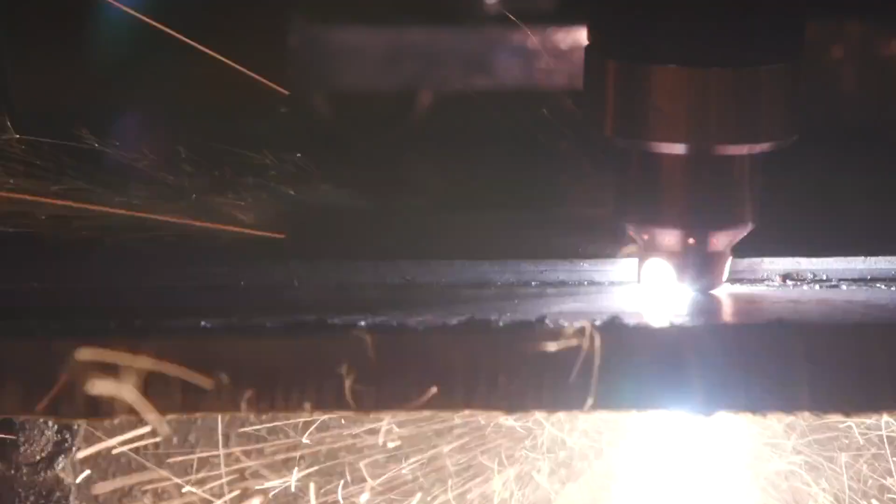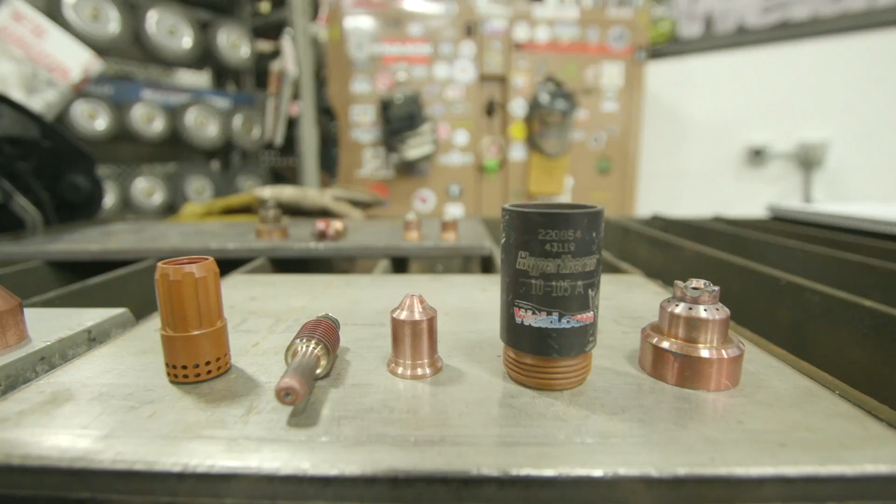So today we're going to talk about the basics of plasma arc cutting. We're going to go over all the consumables, how to tell when they're bad, what types of consumables to use. We're going to go over the settings for the machine, and we're going to cut some different types of materials.

So the first thing we want to talk about is what is plasma. Plasma is the fourth state of matter. You have solid, liquid, gas - those are three states of matter everybody's familiar with. And then plasma - it's just a superheated column of gas. So lightning is considered a plasma. The plasma column is a 40,000 degree Fahrenheit heat.

Within this system, we're going to use a transferred arc system, meaning we have to have a workpiece clamp, we have to have a torch, there's going to be an electrical circuit, electricity is going to flow through that circuit, and we're going to be able to cut any material that's electrically conductive. So it doesn't matter, steel, stainless, aluminum - doesn't care. As long as it's electrically conductive, we can cut with it.

Whereas with oxyacetylene, it has to contain iron, because oxyacetylene is a chemical reaction. It's basically an accelerated rusting process, so it's limited to items that contain iron. So you can't cut non-ferrous items like aluminum or stainless steel, chromium, nickel, anything like that.

So there's a lot of advantages with cutting with plasma cutting. For instance, we have a smaller heat affected zone because we don't have to preheat. We're running a 40,000 degree Fahrenheit plasma column, so we're going to cut through that piece of material a lot faster.

Some of the limitations with it - it's not as portable as the oxyacetylene kit. I can pick that up, I can put it on top of a building, no problem, it's a self-contained unit. With plasma arc cutting, I have to have a power source and I have to have air, whether it's compressed gas in a cylinder or shop air. So today for our demonstration, we're going to go ahead and use shop air - that's probably what most of you have at your disposal.

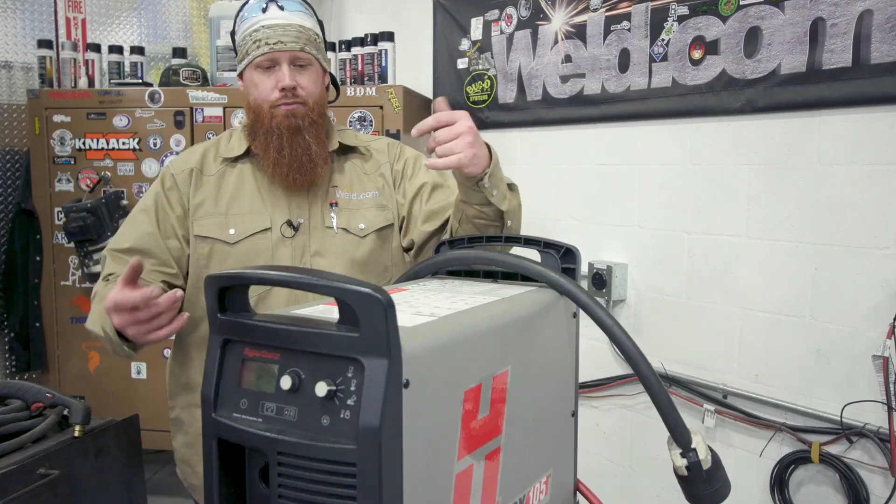So the first thing we're going to do is plug in the air. We have 100 PSI coming into the system. On this system specifically, this is 135 PSI max, so we're going to make sure we don't exceed that. This machine is actually pretty cool because it actually regulates the air pressure coming in off the amperage that's going to be put out. Your machine may vary slightly, so make sure you check your user manual for the air pressure settings as well as your amperage settings for the type of equipment that you have at the house.

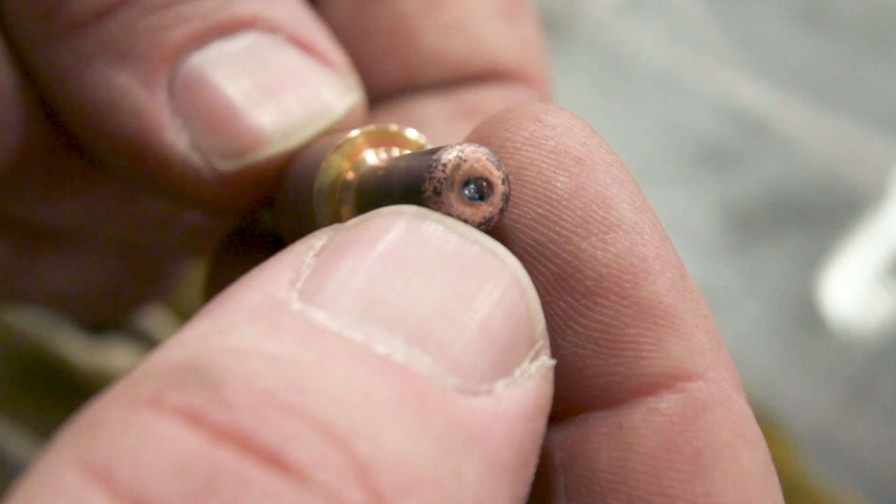First thing we're going to do is just plug in the air hose, very simple. Now in here we have a filter. You want to have an air dryer, filter, all that good stuff in place, because if you start getting moisture in your lines, it's going to come out in your torch and you're going to burn up your consumables a lot faster. So if you notice that you're pretty proficient at the cutting process, but you keep burning up your consumables, it's probably because you have moisture in your line.

So hook up an air dryer. They make little attachments that go on the back end that'll kind of help prevent some of that stuff from getting in your lines. Next thing, let's go ahead and take a look at the front of the machine, and we'll start setting up the accessories, the attachments that go with it.

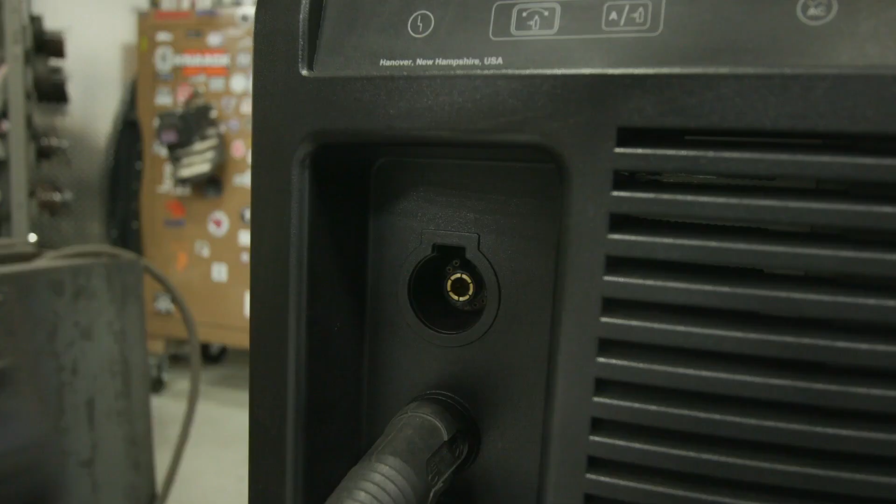So the first thing we're going to hook up is our workpiece clamp. It's not a ground clamp - I mean, you can split hairs and get technical about it, but it's just a workpiece clamp because plasma cutting is DC negative, meaning that when I hook the workpiece clamp up, I'm actually hooking up to the positive. The cool thing about this is you can't screw it up, so I can't put it on the wrong polarity, even if I wanted to, because the attachment points are completely different. The torch plugs into this hole, and the workpiece clamp plugs in here. So you can't screw that up - even a welder can't mess it up.

All right, so let's talk about all the consumables that go in here. The first thing, if you notice, on top of most machines or on the side, you're going to have a little diagram with part numbers and descriptions of what everything is. That's just going to make it a lot easier for you to order it.

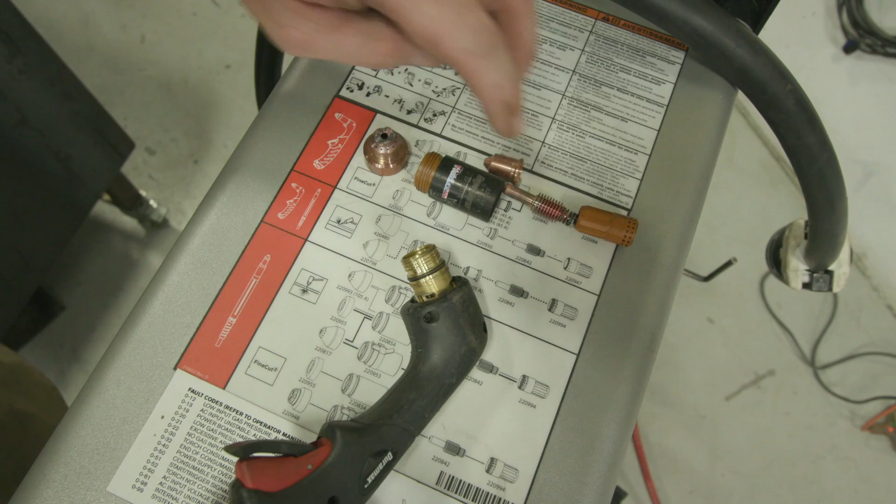So the first thing is the swirl ring. The swirl ring is actually going to direct our air down through the torch, and it's going to create a counterclockwise direction for the plasma column to follow. So it's just going to make a nice cylindrical shape of the arc.

Right here's our electrode. Electrodes are typically made out of tungsten or hafnium. You can tell when they start getting bad because you're going to develop a deep pit in here. Anything after a depth of about 1 millimeter, that's about time to throw the consumable out. But if you're less than 1 millimeter, or the equivalent of a 32nd, it's still good - so don't throw these away until you reach that depth.

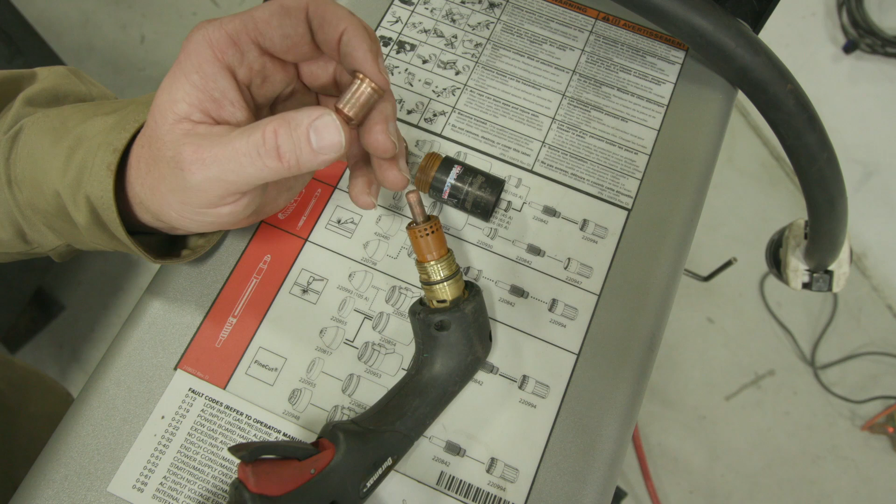That's just going to slide in here like that. This is our nozzle. Now note, this nozzle is 105 amp for our system. Make sure you have the correct nozzle that you intend to use when you're cutting, because if I ran like a 45 or 65 in here and ran 105 amps on my machine, I'm going to burn this nozzle up. Now nozzles kind of get - whenever this hole up here starts getting elliptical, or it has a circle in there, or dented, damaged, cut up, burned up, it's time to change that out.

This is something you don't want to make contact with your material. You should stand this off roughly 1/8 of an inch from your material. We're going to cover that when we get into cutting, but make sure that this doesn't make contact with whatever material you're cutting, because it's going to tear that orifice up. Once that orifice is all messed up, your cut quality is going to go downhill really quick.

All these pieces go in here just like this. You really can't mess this up - if you do, the torch won't work. You'll get an error code on every machine I've worked with. If these aren't in place, if something's missing, this torch will not fire, because it has different safety measures in here. I have a retaining cap right here.

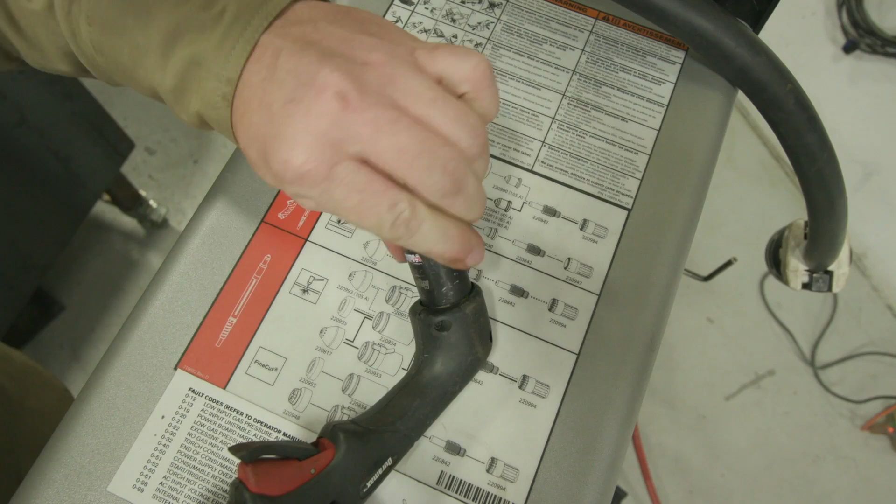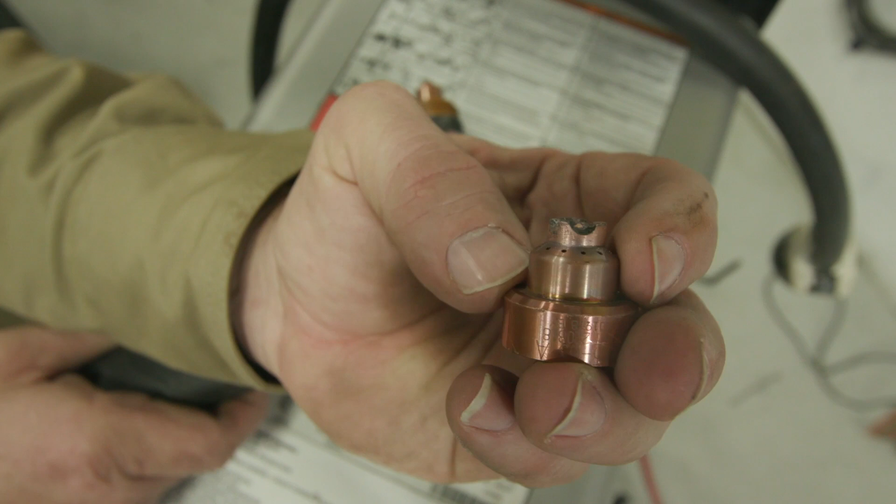This is just going to hold everything together, and then we will take our shield and put that over top of here. Now this is a drag shield - notice it's got like a crown on top of it. I'll be able to put this right up against the material and won't have any issues with that. Notice there's little air ports around here, not like where airplanes fly out of, but there's little ports where the air comes out, and that's going to keep all my consumables shielded as I'm cutting. So I'll slide this over top of here, lock this down, and again, this I'll be able to make contact with the material. It's going to stand off a distance that's going to keep that nozzle protected on the inside of the torch.

So depending on the thickness of the material you're going to cut, you're going to swap out your consumables. You have like 45, 65, 85, 105 amp consumables. Today we're going to be using 105 amp consumables just because that's what we have on hand. We're going to cut a variety of material thicknesses, and we'll be able to do that all based off of 105 amps. Unlike welding, where I need specific amperage for different thicknesses of material, my amperage is going to stay constant depending on the type of consumables that I put in there.

The only thing that's really going to change is my travel speed. If I have thicker material, I'm going to cut slower. Thinner material, I'm going to cut a lot faster. I'm going to show you how that works when we get over here to cutting the material.

Now that we're plugged in, we're going to go ahead and turn this on. I prefer to plug the machine in after I've got everything hooked up to it. This is my personal preference. I think it's a lot safer that way.

So we're at 63 amps right now. I'm going to go ahead and crank it up to 105 because I have 105 amp consumables in here.

Now you'll notice that I have a selector switch over here. The first one has little spaces in it—that's for cutting expanded metal. So if you have perforated material, expanded metal, anything like that, this is going to be the appropriate setting.

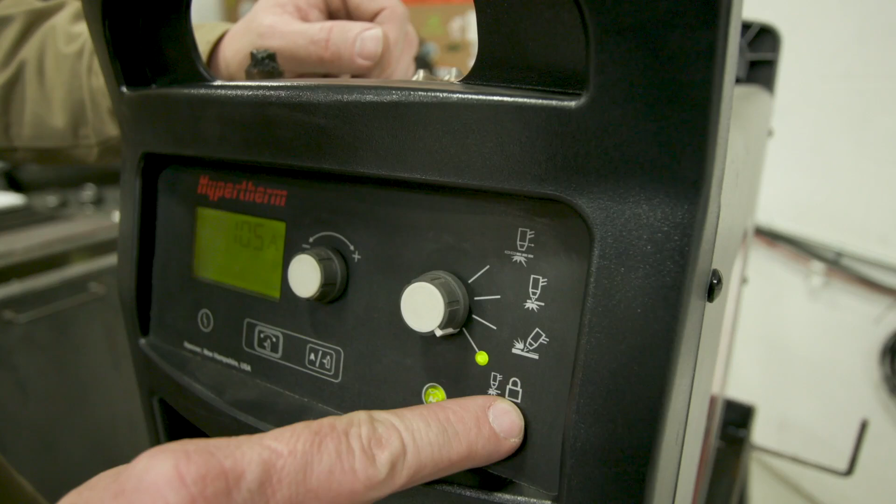You can kind of see it's at an angle. The last one here is just a trigger lock, kind of like 2T or 4T on your foot pedals and finger switches on your TIG torches. Very similar—I pull the trigger and let off, and that pilot arc is going to stay lit until I pull that trigger again and let it go.

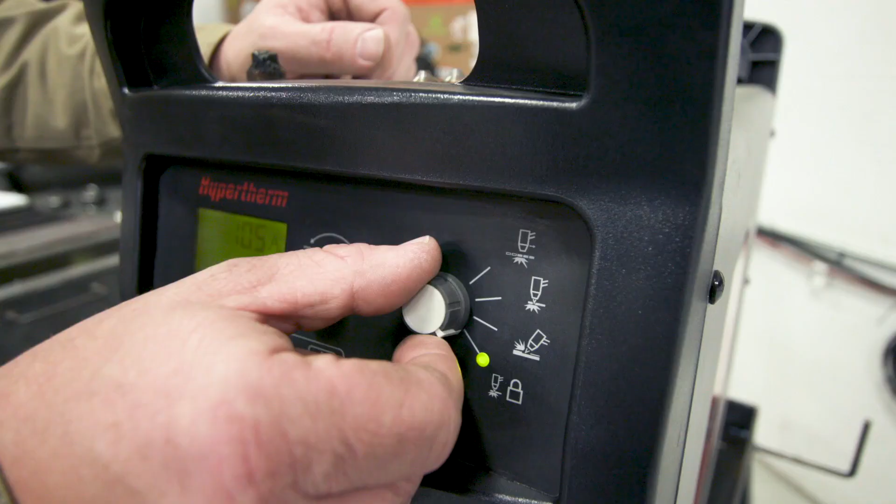If you're doing long runs, that's great. That's probably where you would use that setting—long runs on material, anything like that. I'm going to go ahead and set it here for solid material, and we'll hop on over here and go over some of the consumables one more time to explain, and then we'll do some cutting.

Okay, so let's go ahead and talk about worn out consumables first. This right here is our electrode. See how we have this big divot in here? That's bad, that's not what you want. Anytime it exceeds about a 32nd of an inch or 1 millimeter, you want to go ahead and throw this out.

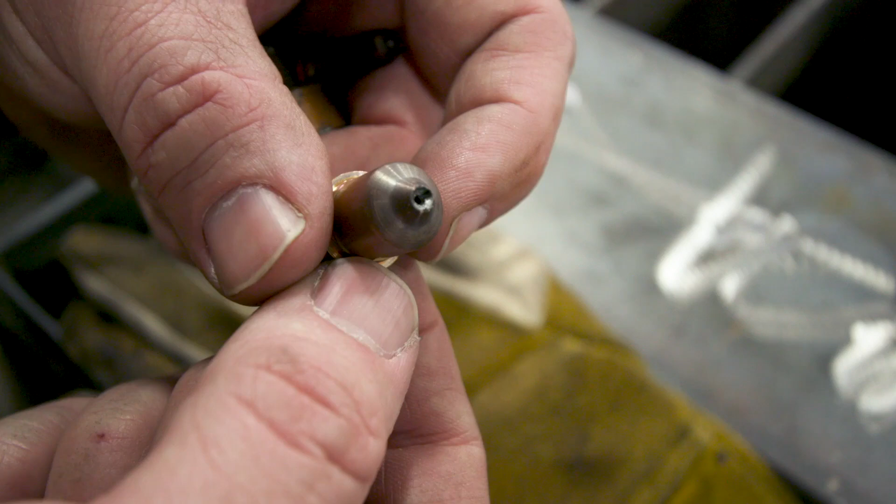Now here's a nozzle that's seen better days—it's kind of well worn. The orifice, the cutting orifice in here, is kind of wallered out. Yeah, that's a word, wallered. Once it's torn up like that, it's good practice to swap both of these out at the same time. The manufacturer recommends that anytime you swap out your nozzle, go ahead and swap out that electrode.

And vice versa. This is a drag shield. I don't know what happened to it, just laying around the shop—looks like it's seen better days, got some melted areas in here. That'd be a good time to go ahead and swap this out as well.

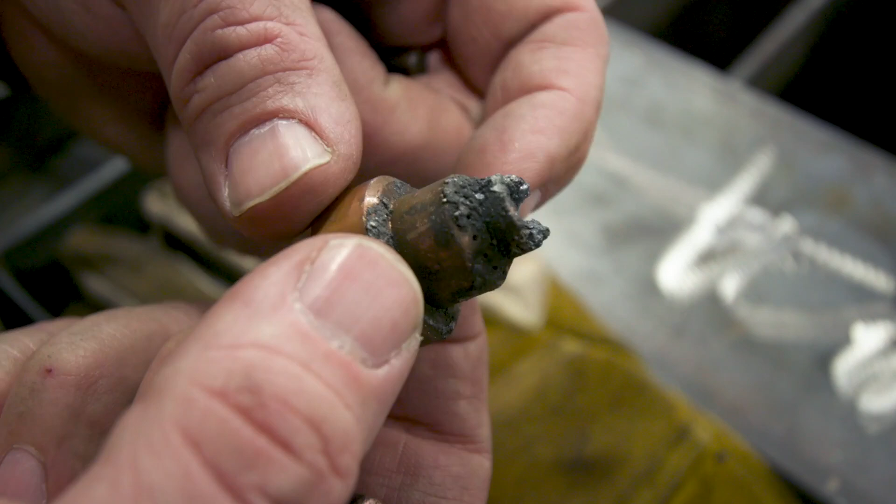Remember, it's okay if this piece makes contact with the material—it's not part of the electrical system, so you can make contact with the material. That's exactly what it's designed for, to keep that standoff distance the appropriate amount away from the material while you're cutting. But it's probably a good time to go ahead and swap this guy out.

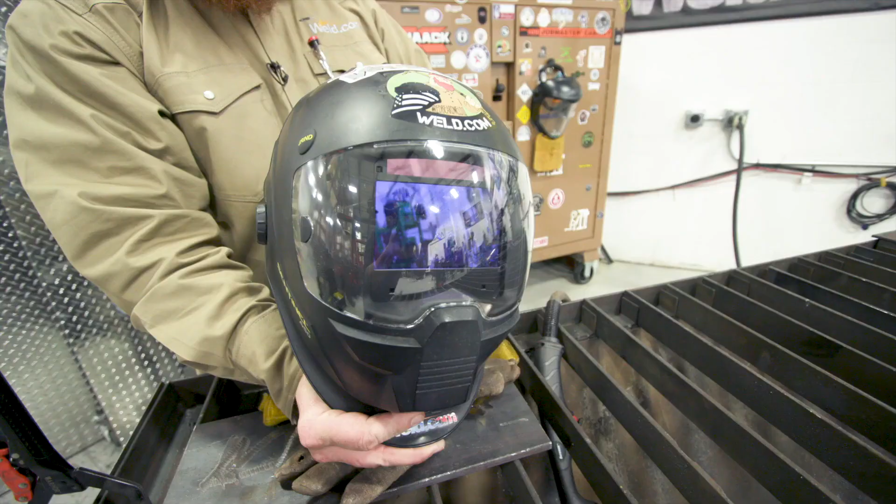So let's go ahead and talk PPE real quick, because with any job that we're going to do, safety is always first. Wear dry garments, so welding jacket, welding cap, always a plus. Safety glasses, as we discussed in our last video. I prefer to use a welding hood, just for the simple fact that I'm going to deal with 105 amps here.

Infrared glasses, while they're great—these are awesome for oxyacetylene cutting—this is not something I would use if I was going to be doing plasma arc cutting, anything probably above 40 or 50 amps. So because we're using 105 amps, I'm going to go ahead and use the shade 9 on my welding hood.

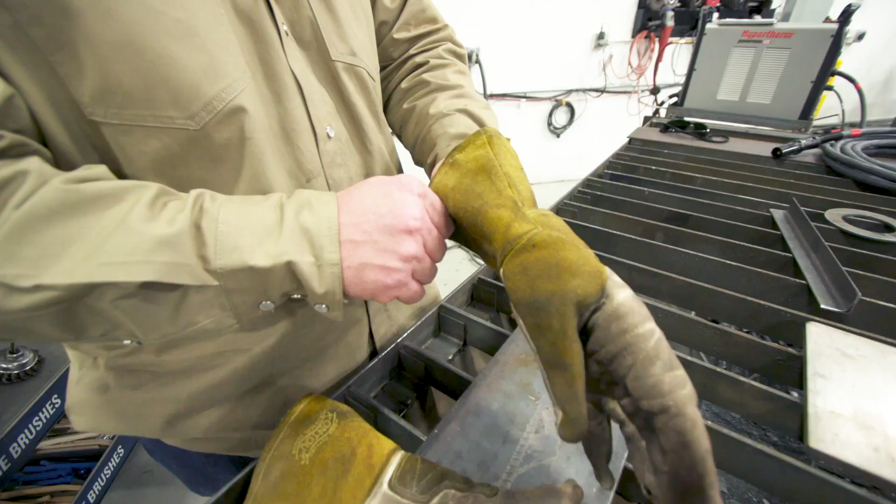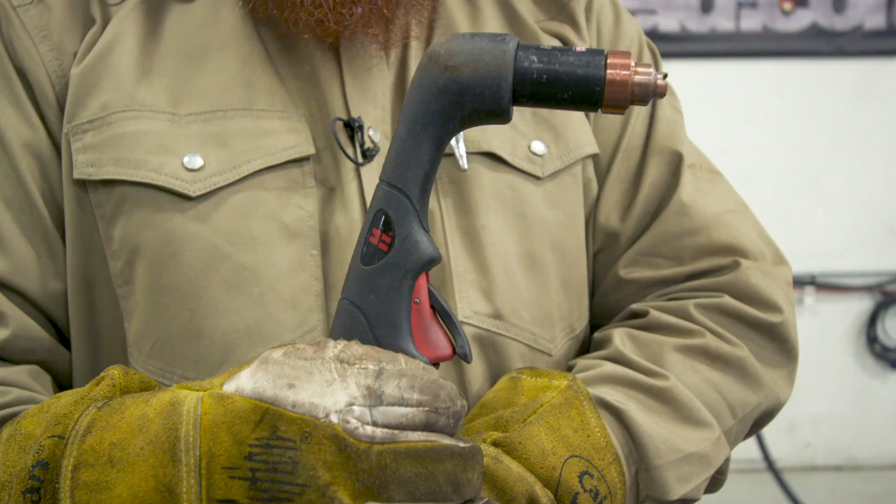And then we're also going to make sure that we wear leather gloves. Again, stay away from synthetic fibers because they're going to melt, and when they melt, they're going to melt to your hand—you're just going to have a bad day. Something with a little bit of dexterity, because on here we have a safety switch, and you want to be able to get your finger up underneath there. So a big gaudy pair of arc welding gloves probably aren't the best things to use.

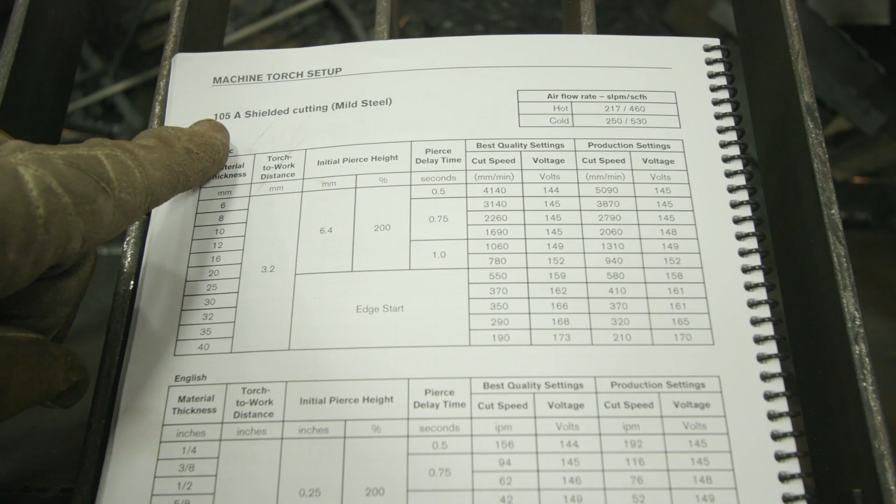I'm going to reference my manual here. It says for 105 amp consumables, which we have in the machine right now, mild steel, I'm going to cut some 3/8 plate. It tells me I need to run about 94 inches per minute. So how do I gauge that?

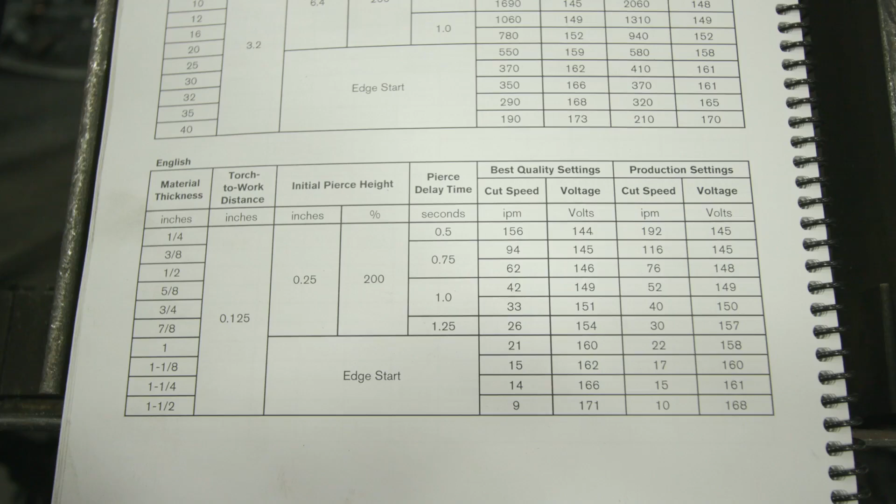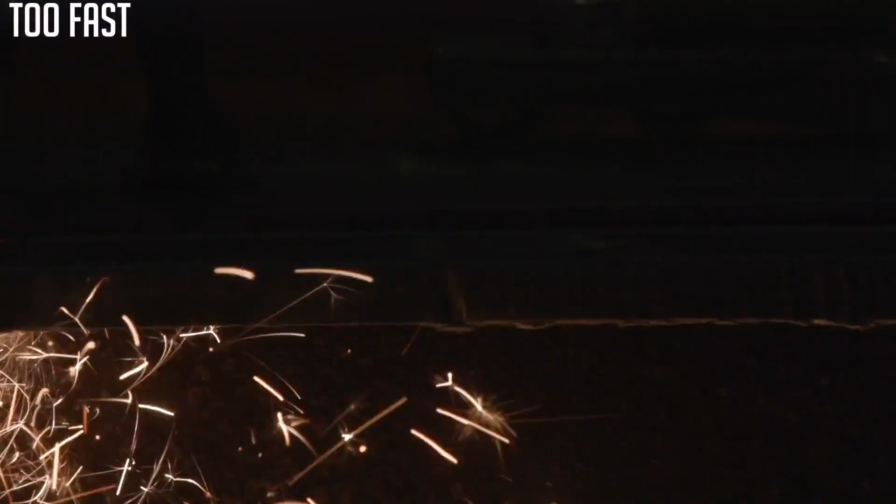This is something you're going to have to do visually. If you're cutting too fast, you'll notice all your sparks are shooting out away from you, or in the opposite direction you're cutting, at a pretty steep angle. You want them to come out slightly, probably about a 10 to 15 degree angle from the bottom. If they're coming out straight down, you're cutting too slow.

I know that sounds counterintuitive, but if you cut too slow, you're going to have a much wider kerf, which is the area of material loss due to the cutting process. Doesn't matter if it's a Skilsaw, table saw, plasma cutting, or oxy-fuel, that's what that kerf is. So that's the width we're taking out of the material. You want to make sure you're cutting on the appropriate side of the line, or on the line, and understand the width of your kerf.

If I cut too slow, I'm going to have a much wider kerf, and a lot more dross on the bottom of my plate that I'll have to clean off later. I don't want to deal with that. I want to make this as less labor intensive as possible. So we'll show you three cuts: too fast, too slow, and then just right, kind of like Goldilocks.

I'm going to get rid of the paper because plasma cutting can shoot sparks up to 40 feet, so I'll try not to cut towards the cameraman over there. You also want to check the surrounding area, especially in a small garage or shop. If you've got gas cans or lawnmowers around, move that stuff out of the way or move your cutting operation to a different area. These sparks can travel up to 40 feet, so don't cut in enclosed spaces.

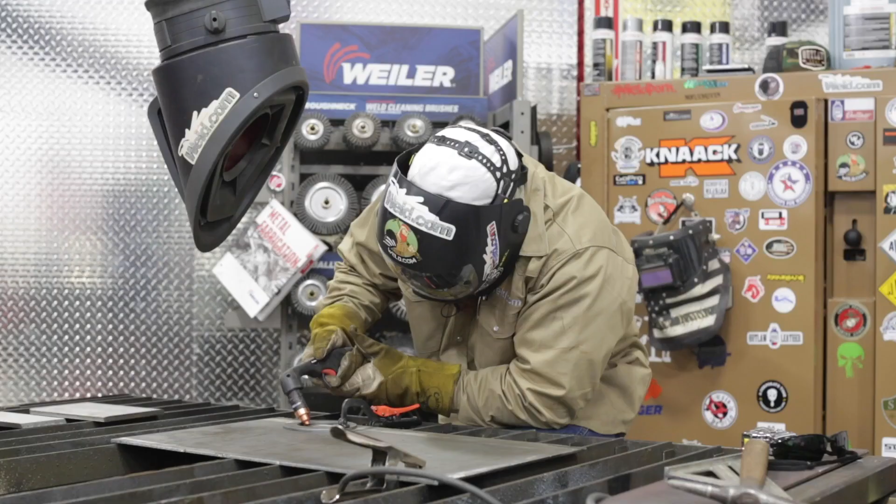While we're on the topic of safety, fume extraction is a must. We're going to set up a vent over top of this while we're cutting. You don't want to breathe this stuff in, especially when we get into stainless and aluminum, because stainless contains hexavalent chromium. Anytime we cut, grind, or weld on that, make sure you have a respirator or source fume extraction. Same thing with aluminum, this stuff is just nasty to breathe in. You don't want to do that.

So set up the fume extraction. If you're in your garage, set up a fan. If not, set up the operation outside. Just make sure you're not doing it over a bunch of dried leaves and grass and stuff like that.

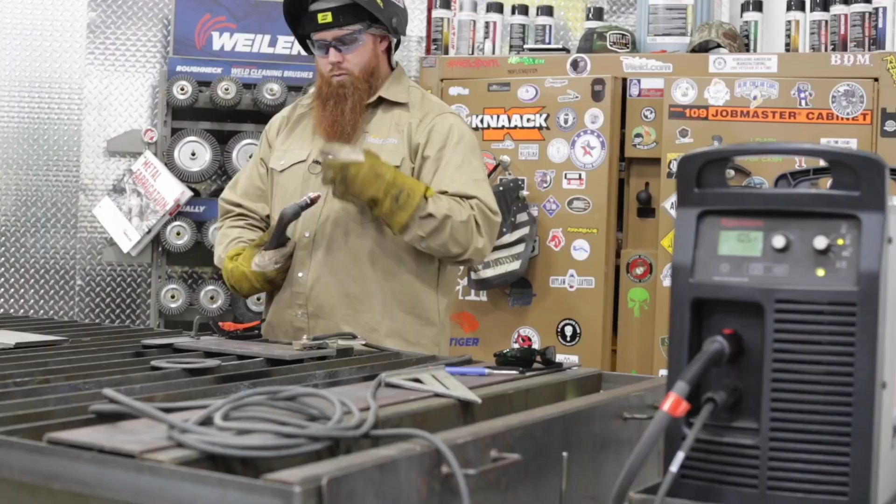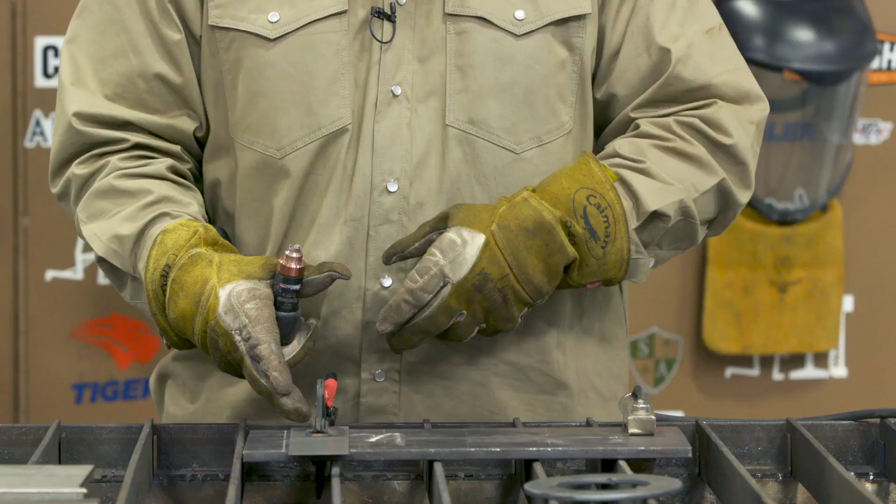What I want to do now is measure from the outside of my orifice, or the outside of my drag shield, to the center of my orifice, and it's about 3/16 of an inch. So I'm going to offset a piece of flat bar, or just a little piece of sheet metal, 3/16 of an inch from the line I intend to cut. That's kind of how you keep everything nice and straight while cutting and fabricating. Just set that little offset. This is 3/16, yours is probably going to be different.

Same thing if I have a standoff guide, I would actually measure from the outside of that standoff guide to the center of the orifice on the torch. That way when I cut, I get nice, clean, consistent cut marks, and my accuracy is going to greatly improve versus trying to do this freehand.

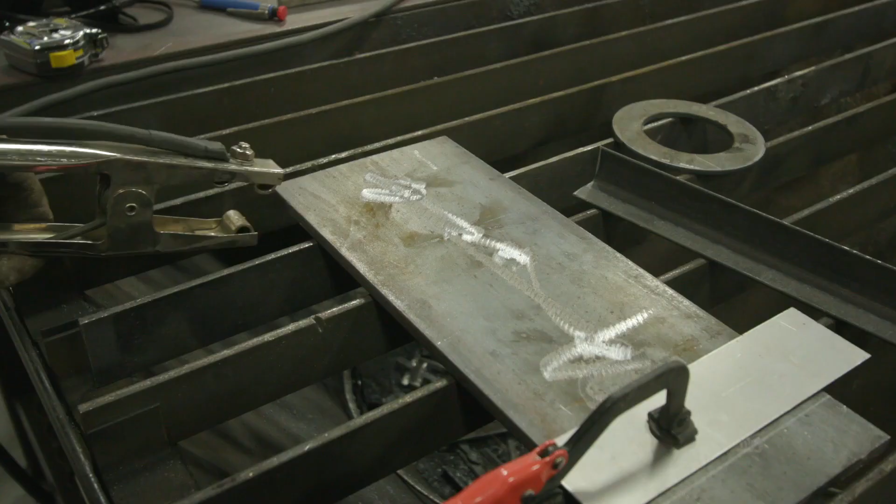I went ahead and hooked up the workpiece clamp because you want the electrical circuit to be the path of least resistance, right, since we're using an electrical system to do this. Notice that the workpiece clamp is on the side that's going to remain on the table. I don't want to put it on the piece I'm cutting off, because once I cut that piece off, it falls with the workpiece clamp, and I could become myself the path of least resistance. Okay, this is a high frequency system.

I don't want to get shocked with it. So keep the workpiece clamp on the material, not the part that's going to fall off. Try to keep yourself out of the electrical circuit. Don't put yourself in that situation.

I could hook it to the table, but like I said, path of least resistance. So the closer I can get it to the material, the better cut quality I'm going to get, the better ease of use, more efficient I'm going to be with it.

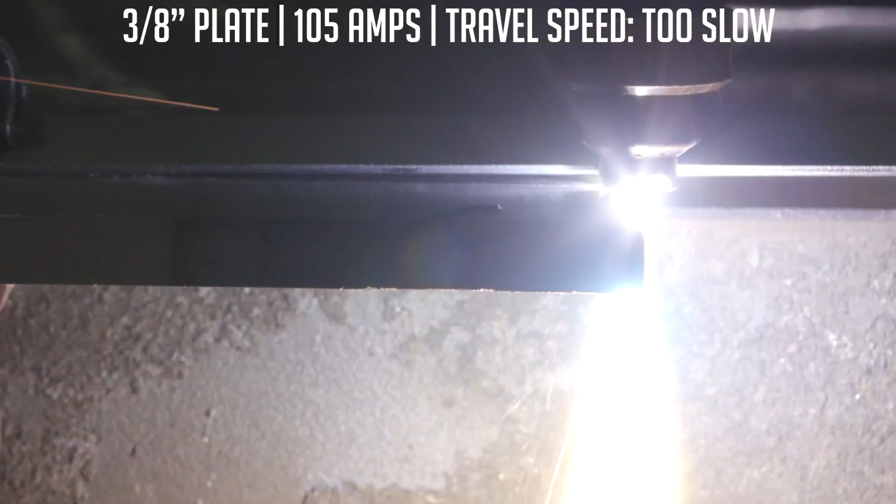So, the first one we're going to cut too slow. I'm going to go ahead and start cutting. I'm going to start right here on the edge of the material, pull the trigger, and I'm going to cut too slow, so the spark should come straight down.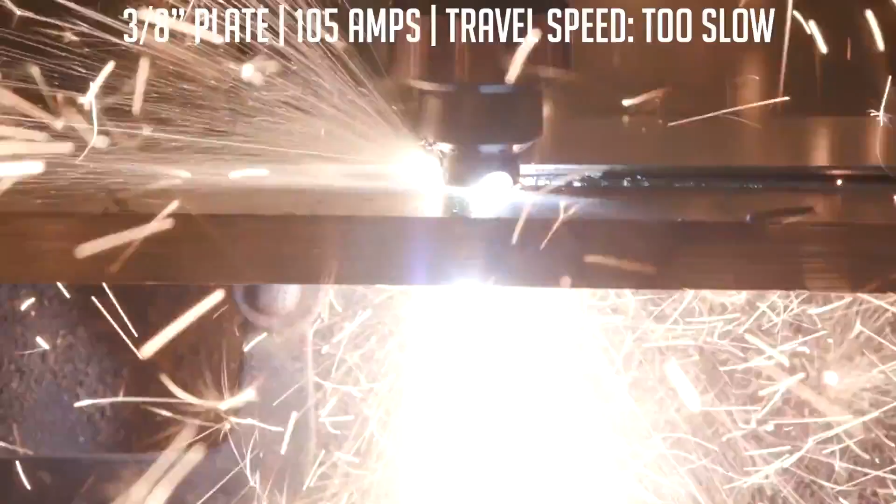You can notice the travel speed is, since we're going so slow, it's kind of difficult to control the torch because I have material building up on the top of the plate as well as on the bottom, and that's just causing this drag shield to stick a little bit.

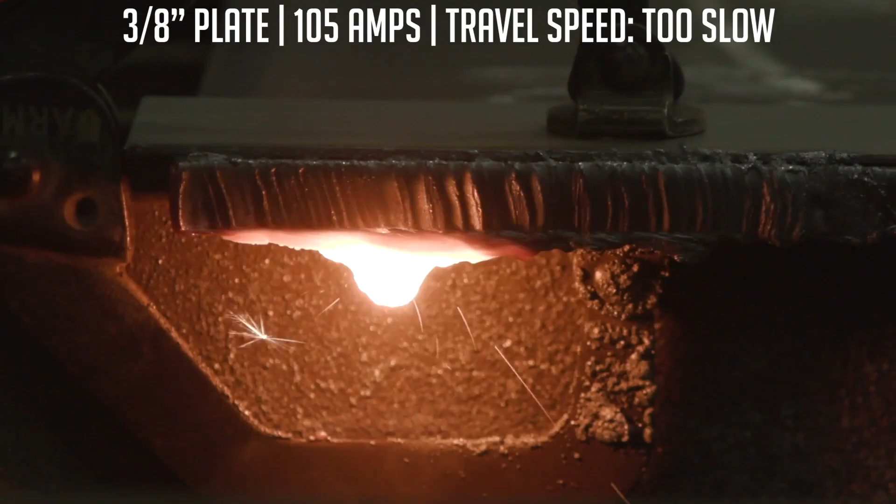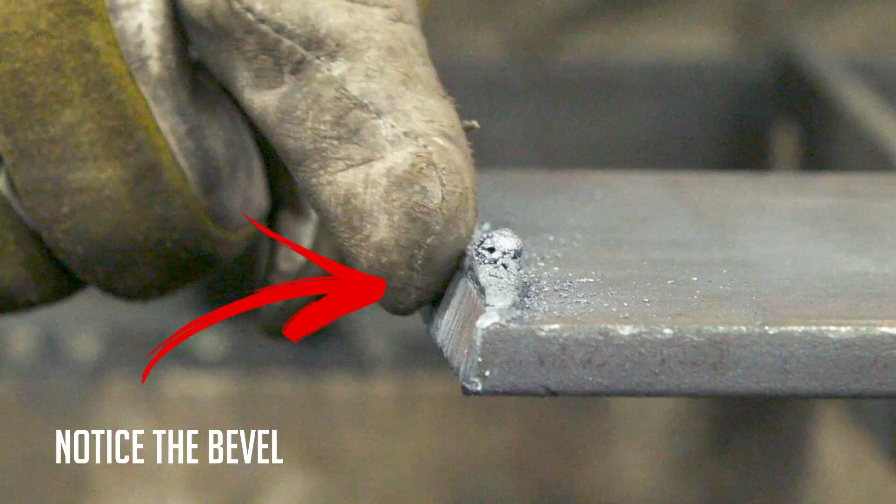We'll go ahead and flip it over here once we're done, and we'll show you the bottom. You can see that I've got plenty of dross built up here on the bottom. It'll be easy to take off with the chip hammer, but you can see the cut quality is just crap. I've got a severe bevel on there just because it took way too long to cut that piece.

That's kind of what we wanted to show you. That's what your cut quality is going to look like if you go too slow. Remember, one of the advantages of plasma arc cutting is the ability to travel much faster.

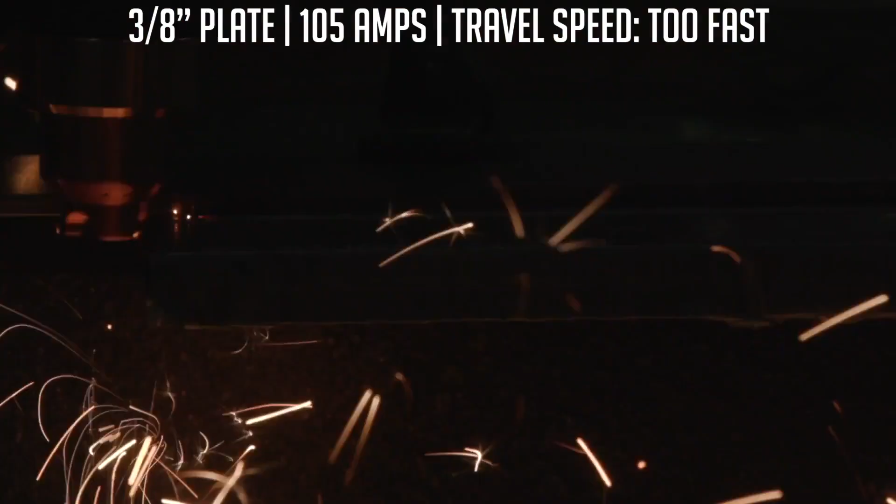All right, so now we're going to go ahead. I'm going to set this back up. We're going to show you too fast. All right, so that was too fast. You can kind of see how the plasma coming through there was scraping off the bottom, pointing further away from me. Like I said, you want about a 10 to 15 degree tilt away from you as you're pulling it towards you, or away from the direction of the cut.

So I'm going to go ahead and cut one last piece, and this should be right about the appropriate speed. You just kind of have to judge it as you're cutting through.

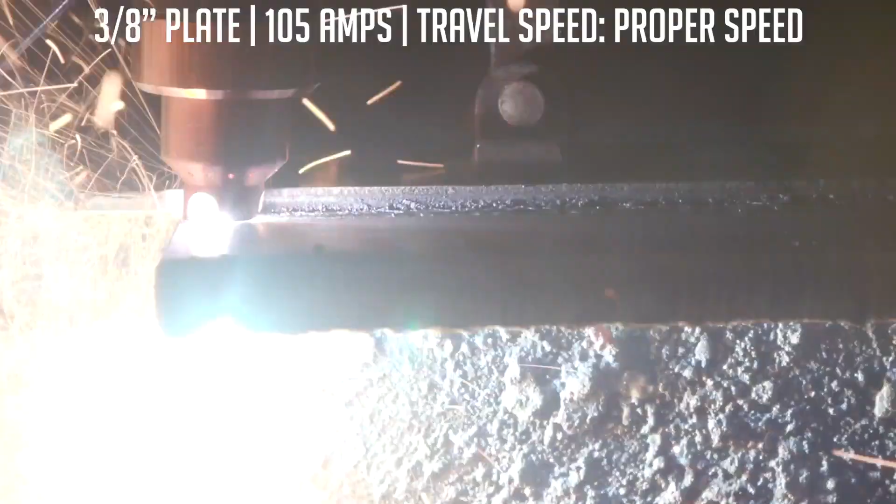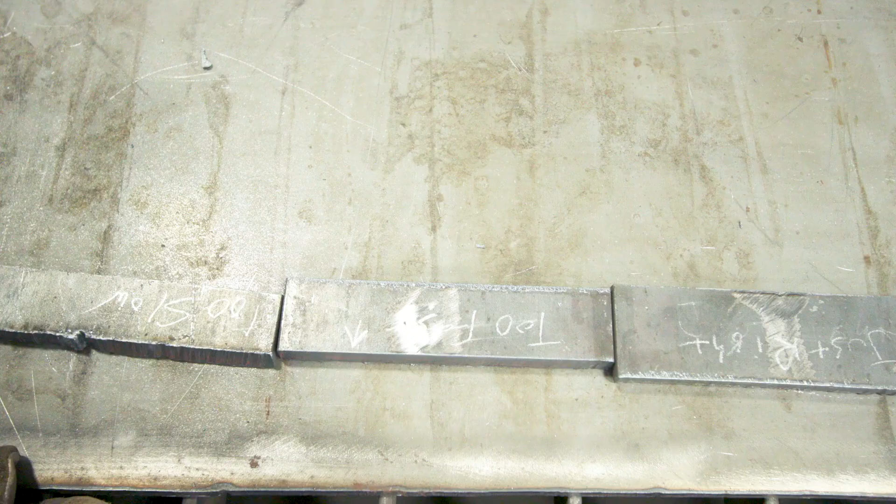All right, so let's go ahead and take a look at the samples we cut. So, this first one was too slow. Disregard this piece right here, that was completely human error. But the rest of it, you can kind of see the cut quality on here. Not to mention the fact that it's pretty ate up as far as the bevel.

Okay, so that's the cut line, or the cut was too slow. This one here, the cut was too fast. Although it looks pretty clean, it's not bad. There's not a lot of dross on the bottom over here. I mean, there's a little bit, but nothing we can't hit with a wire wheel or a chip hammer.

But let's take a look at that bevel, right? So we got a pretty decent bevel on there. I'd like to have a 90-degree cut if I was cutting a piece, depending on what I was cutting. And this one was just right, okay?

A little bit of excessive dross on the back here, but the cut quality as far as the bevel is much better. Much closer to a 90-degree angle on this one.

So, and a lot of this stuff, I mean, we're kind of nitpicking. You can clean that up with a grinder. We just want to show you the difference so you can identify what's going on with your cutting, if you're too fast, too slow, or if your speed's just about right.

And it's going to vary on different thicknesses of material. Remember, go back to your user manual and check the cutting speeds for each thickness and type of material you're working on. It's going to be completely different if I was working on something like stainless steel. All of my travel speeds are going to completely change depending on the thickness and the type of material I'm working on. Same thing with aluminum or any other type of material.

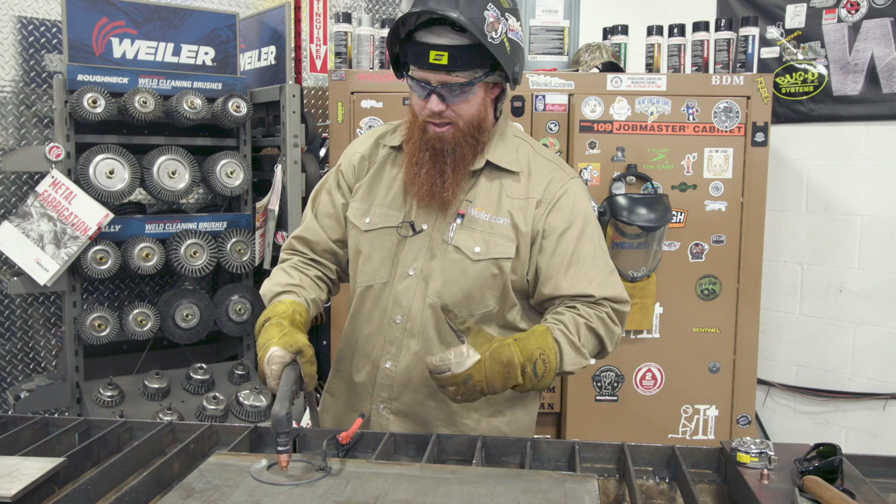Because the plasma column comes out clockwise, just like kind of like a router—I don't know if you ever used a wood router—I'm going to cut opposite of the direction that it's cutting out. So it's always going to have your cleanest edge to the right hand side of the plasma column.

So the first thing I'm going to do is cut a hole in the plate. The piece that comes out of the middle, I don't care about it. I want the clean cut quality to be on the plate, not the piece that's falling out of it.

In addition, depending on what type of template you're using—remember, on this one, my personal torch side, yours is going to be a little bit different—I have a 3/16 offset. So whatever that is, I'm going to have to double that for a circle, so the diameter. Once I get done with this, I should have a hole that's 3/8 less than the template I have right here.

Before I make that rotated cut, since I'm piercing through a plate, starting out here on the edge is fine, but if I try to punch straight down, especially on thicker material, that material is going to jump back up. It's going to clog up my nozzle or burn it, tear it up. It's just going to destroy the consumables.

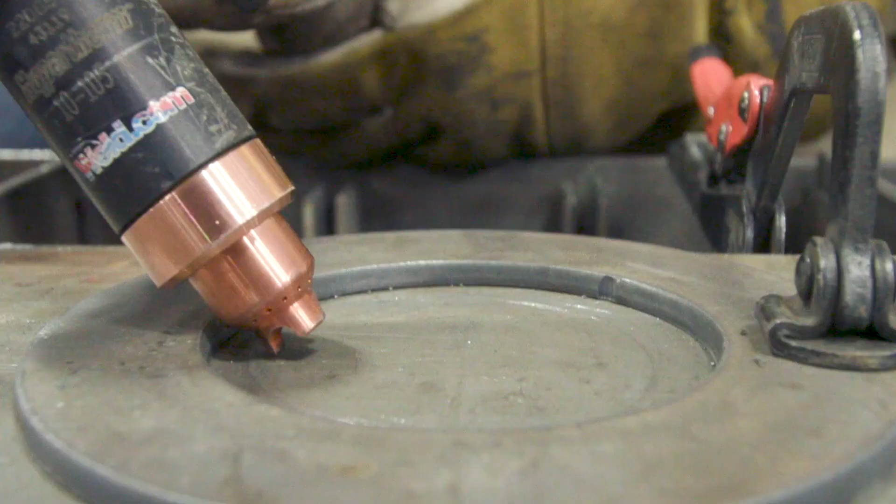So what you want to do is start off roughly at a 45-degree angle. I'll pull that trigger—sparks are going to fly that way, so be cognizant of what's in that area—then rotate up to 90 degrees, and then go about your business and cut that piece out. Anytime you're doing a pierce cut, start off roughly at a 45-degree angle, pull the trigger, and rotate up into it.

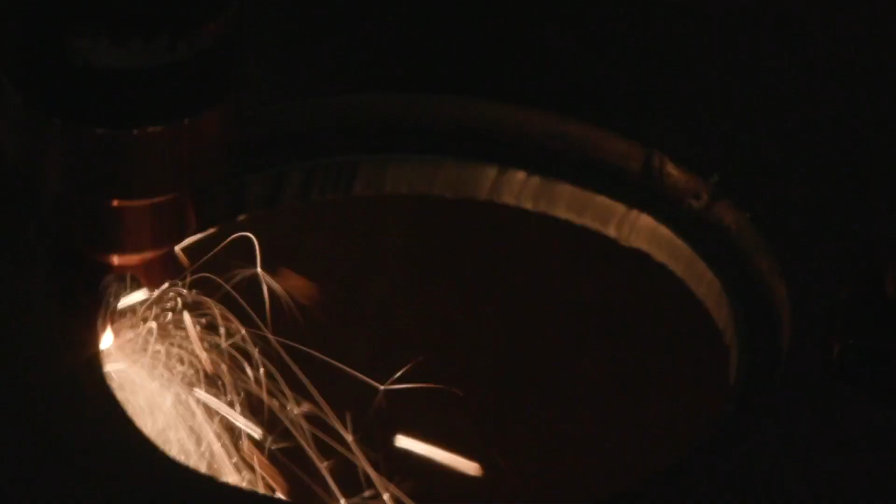The hole right here on the plate, which is what I wanted, has a much greater cut quality—almost a 90-degree vertical up and down cut, so it doesn't taper in. However, the piece we cut out does have a noticeable taper to it. That's the piece I wanted to discard. This is the piece I wanted to keep—the cut quality is on the plate.

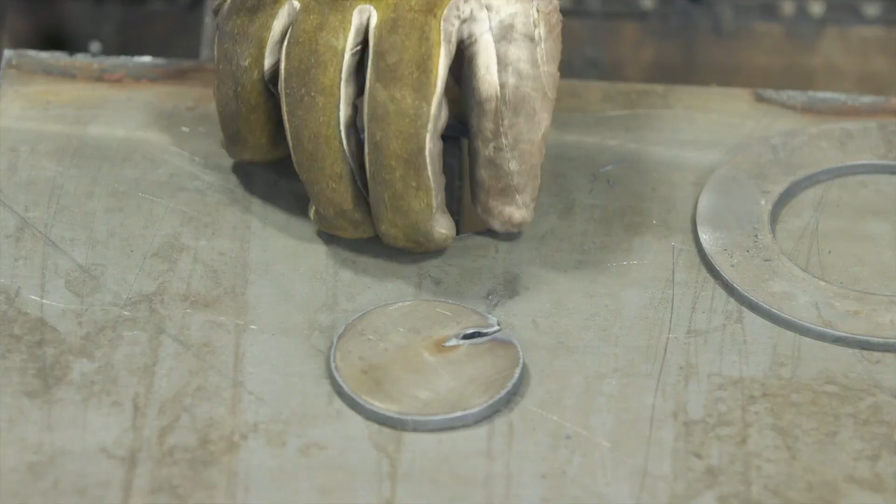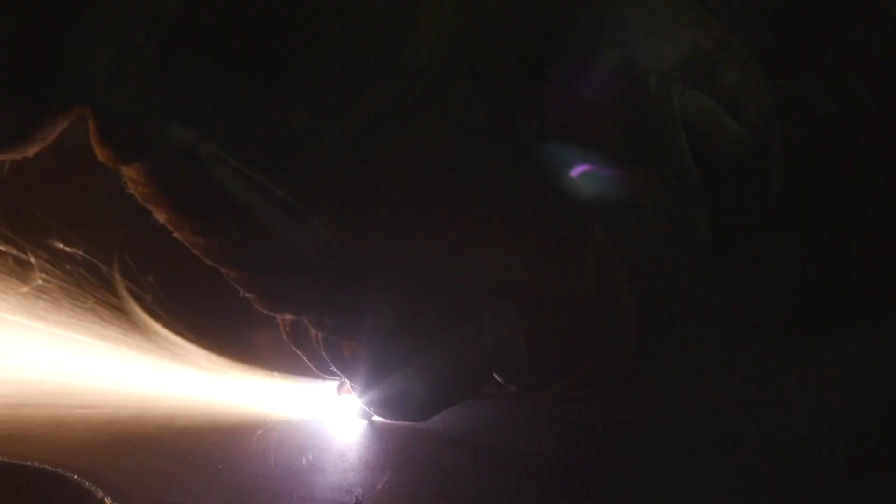Now we're going to do the same thing, but I'm going to cut an outside circle, cutting outside of this template. This time I want to keep the piece that's going to fall out. So I'm going to start outside of the area, do another pierce cut, and then cut clockwise, keeping the piece that I want to the right-hand side of that pilot arc.

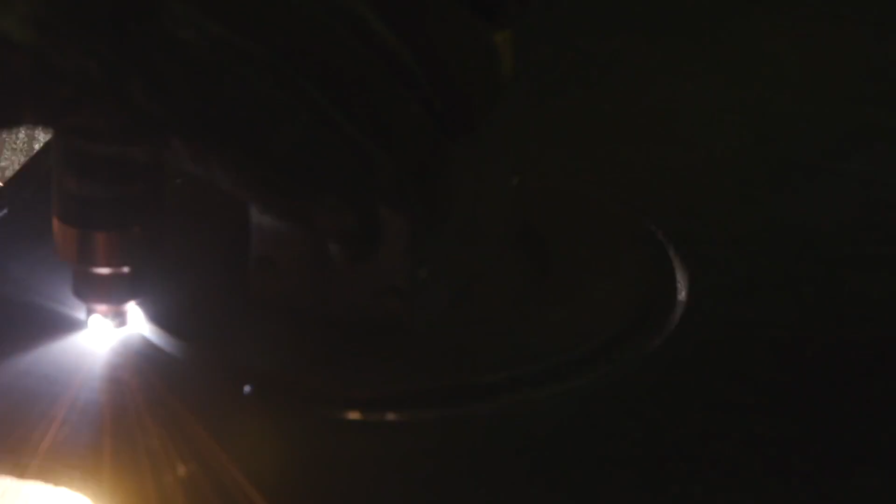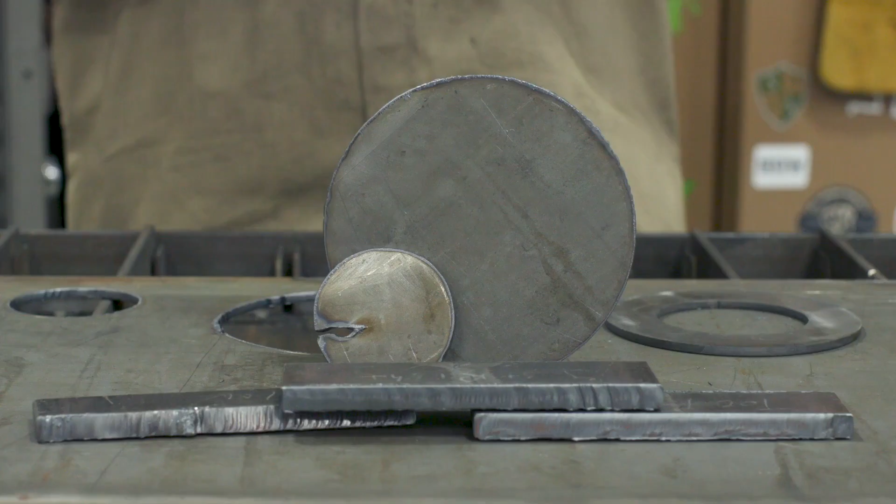Once I do that, the piece that falls out should have the straight edges, and the plate we're cutting out of should have the beveled edges. As you can see, we got better cut quality on the piece that got cut out versus the piece we cut it out of. There's a much larger bevel on the material we cut it out of than on the piece we actually wanted to keep.

You can also tell I need a little more practice because I've been getting spoiled by using the CNC cutter all the time. So it's about time I go back to the basics as well and do some freehand cutting and some cutting with templates and guides.